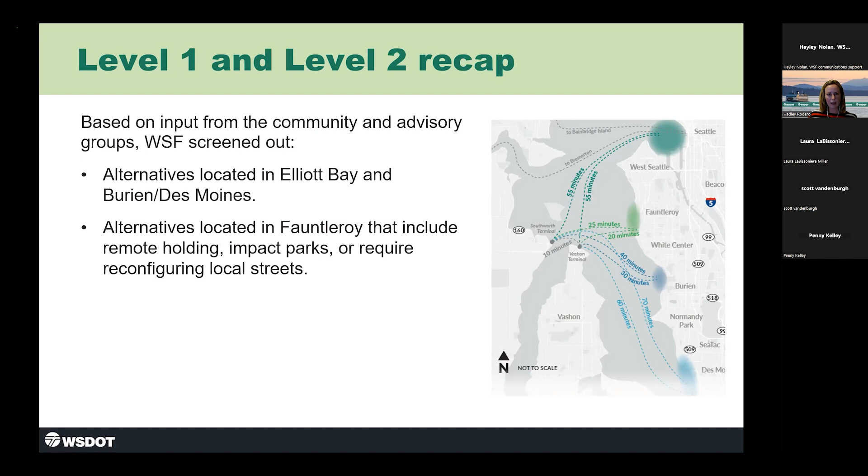A lot of that was based on feedback from this group about impacts that would have on the broader neighborhood and on transit and other considerations. So that brought us to the end of level 2 screening. We released the level 2 screening report a little over a year ago that identified 2 general alternatives: replacing the dock at the same location at roughly the same size as it is today, which holds just over 80 vehicles.

The rest of the vehicles are accommodated in shoulder holding along Fauntleroy Way Southwest for a total of 186 vehicles. We also discussed at that time looking at strategies such as Good To Go or advanced ticketing policies and other operational improvements to make the terminal, and especially a dock of that size, work better and operate better. The second alternative we agreed to carry forward is an expanded dock that would hold 124 to 186 vehicles. But we also said at that time, based on overwhelming comments from the community, that any alternative would avoid or minimize permanent impacts to Cove Park adjacent to the terminal and the nearshore habitat. So those were the two very general alternative descriptions we had about a year ago.

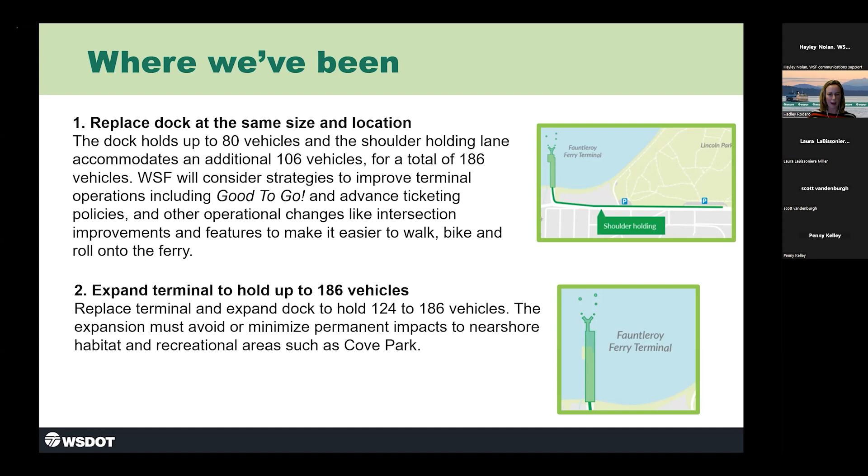Since then, we've been working to refine those two alternatives, and that's what we're going to discuss today. But for more of the process and where we're at, Marsha is going to talk about our timeline.

Thanks, Hadley. We genuinely appreciate your patience this past year as we've been navigating the planning and environmental linkages process and working to refine the alternatives. As you know, PEL is a planning process that involves collaborating with the community and our partners early in the project planning. We are starting the level 3 screening process where we will consider things like traffic conditions, cost estimates, permitting requirements, and ways to make the terminal work safer and more efficiently for everyone. We'll also study Good To Go and advanced ticketing.

All of this work will help us identify a preferred alternative for further NEPA environmental review, where we will evaluate the project and potential impacts on the built and natural environment. We're working on an updated project schedule and plan to begin design and construction by 2027. Please note there is some overlap between the project phases, and we'll work to refine and share updates. This is a multi-year process and will include multiple opportunities for input from our advisory groups, such as you, and the broader community.

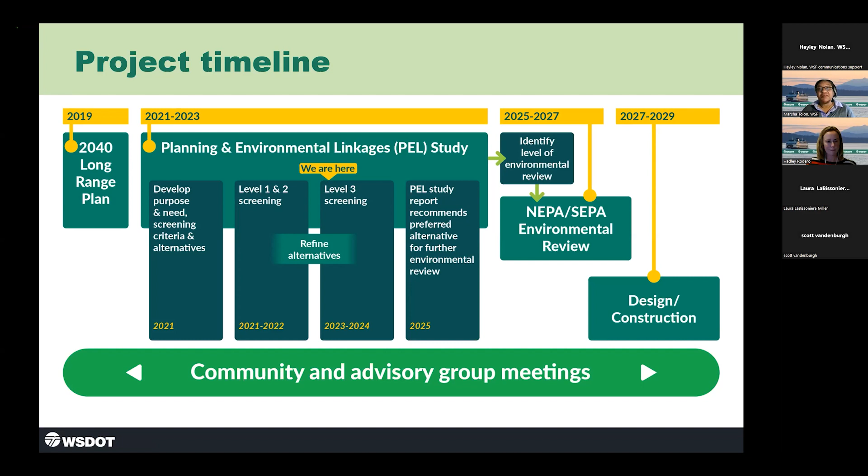To the north, the terminal is bordered by the King County Barton Street pump station. And again on the south is the SPU property and a parking lot owned by the City of Seattle.

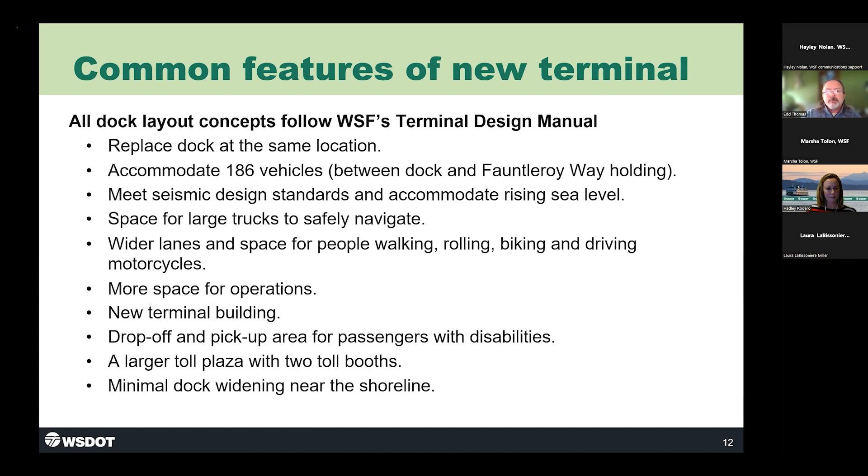Now we're going to present a series of oblique graphics of the alternatives. As we run through these perspective views, we'll go quickly at first so you can see the differences, and then we'll come back and talk about each alternative in more detail. As we scroll through, note that the dark shaded area on either side of the dock, which Marsha pointed out, represents the eelgrass and macroalgae area.

Hadley, could we run through those just one more time?

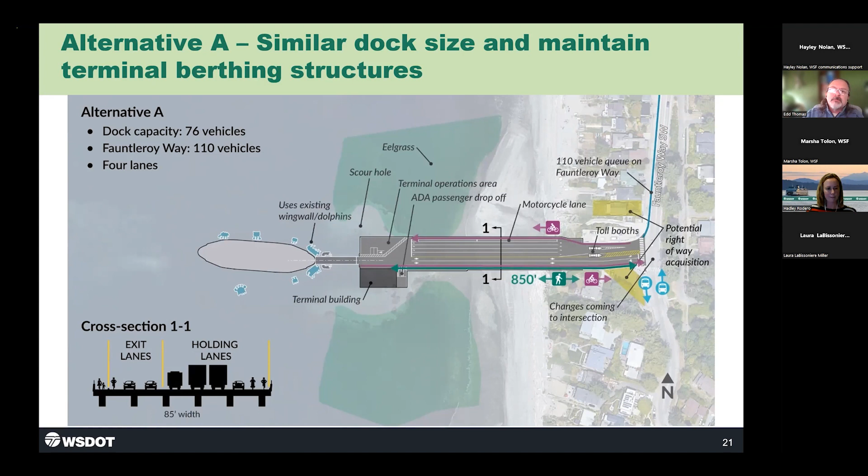The next alternative, alternative A1, is the same width as alternative A but slightly longer than the existing dock, and includes new dolphins and wing walls. This option also has 4 holding lanes and holds the same amount of vehicles as the current dock, which is 84 vehicles.

Alternatives A2 and A3 are variations of A1 with the same layout, but A2 would include Good to Go and A3 would include advanced ticketing technologies.

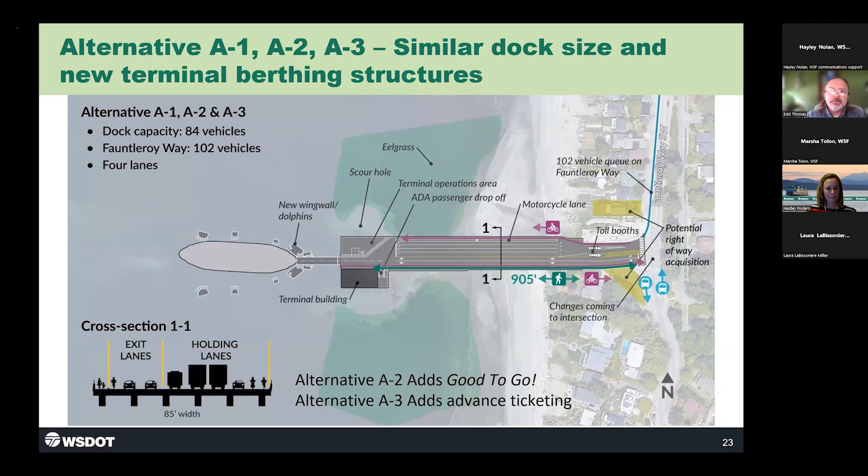Alternative B is the same width as alternative A, but is a longer dock, moving the ferry slip—the transfer span, wing walls, and dolphins—into deeper water. This option has 4 holding lanes and holds 124 vehicles on the dock, which is 1 full Issaquah class ferry. Lengthening the dock and moving the ferry slip to deeper water may allow eelgrass and macroalgae to regrow in and around the scour hole, which would be the same for all of the lengthened dock alternatives.

Alternative B1 is the same length as alternative B. It includes one extra holding lane on the north side of the dock over deeper water, and the near shore widening is minimized to reduce impacts to Cove Park and environmentally sensitive areas closer to shore. With the added holding lane, this alternative holds 155 vehicles on the dock.

Next, alternative B2 is similar to alternative B, has 4 holding lanes, and adds 2 shorter holding lanes to the south of the dock for priority vehicles. This tapered dock design is narrower near the shoreline, again to minimize impacts to the near shore. This concept holds 155 vehicles on the dock.

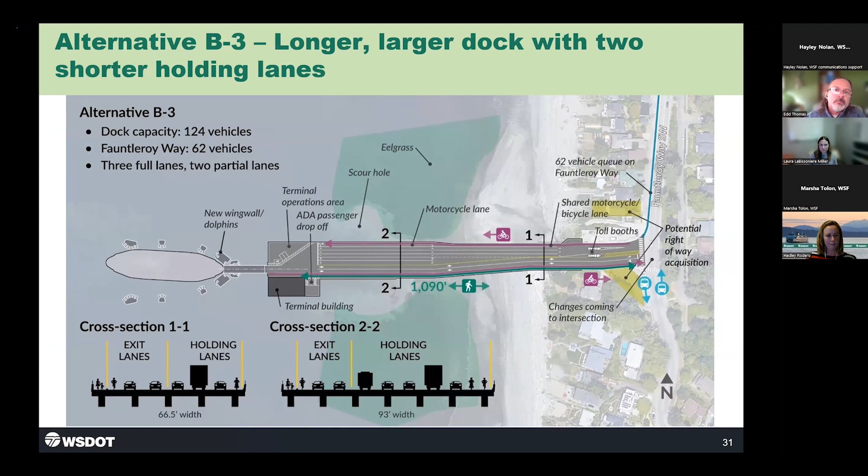They're all variations of a longer dock alternative. Then the last alternative, alternative C, is also a longer dock alternative, similar to alternative B2 in its layout, but adds a full-length holding lane on the north side of the dock. The dock is still narrower near the shoreline to minimize nearshore impacts, and the rest of the design features are the same as alternative B2, including 2 shorter holding lanes for priority vehicles on the south side. This option can hold 186 vehicles on the dock, removing the queue on Fauntleroy Way Southwest on most typical days.

And with that, I'd like to turn it back over to Laura to facilitate Q&A.

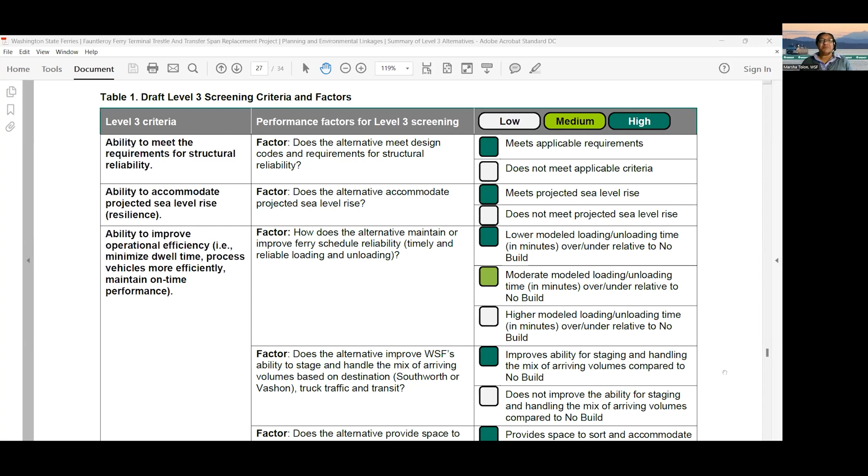You can see the accommodating projected sea level rise is a consistent criterion throughout, improving operational efficiency. There are others as she's scrolling down that you may see within the document that you're familiar with from previous screenings.

The central column, the second one, has performance metrics that we're using to screen in level 3, which were developed out of each of the criteria. The third column shows how we plan to screen the alternatives using yes or no, or high, medium, and low. So as you can see, the screening at this phase is a little more detailed than what we've had for levels 1 and 2, using these specific metrics.

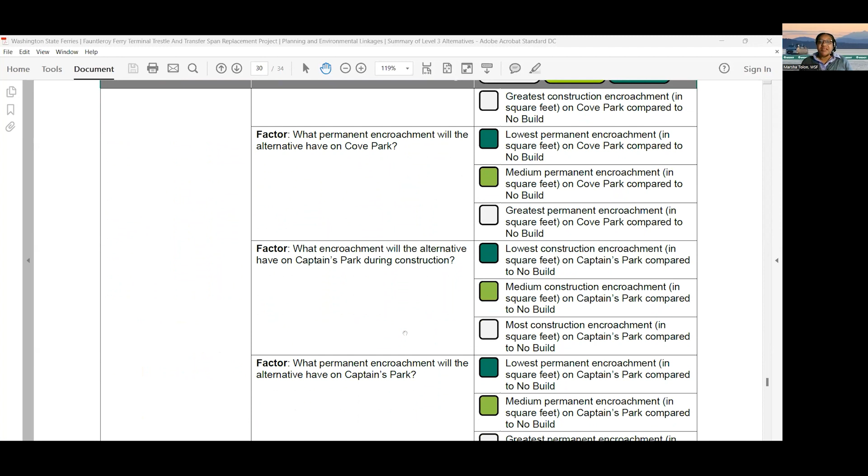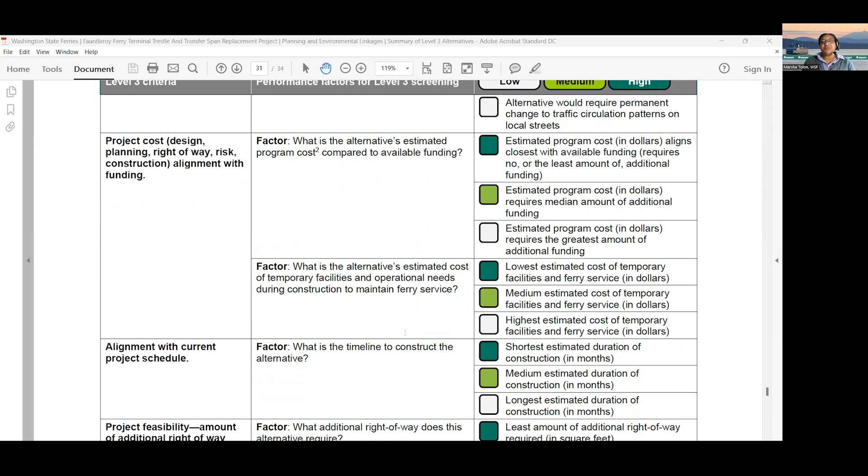It's at a draft state, and we are hoping to get any feedback you have on the metrics and on the approach of yes, no, high, medium, and low. Laura, I'll bring it back to you for more discussion.

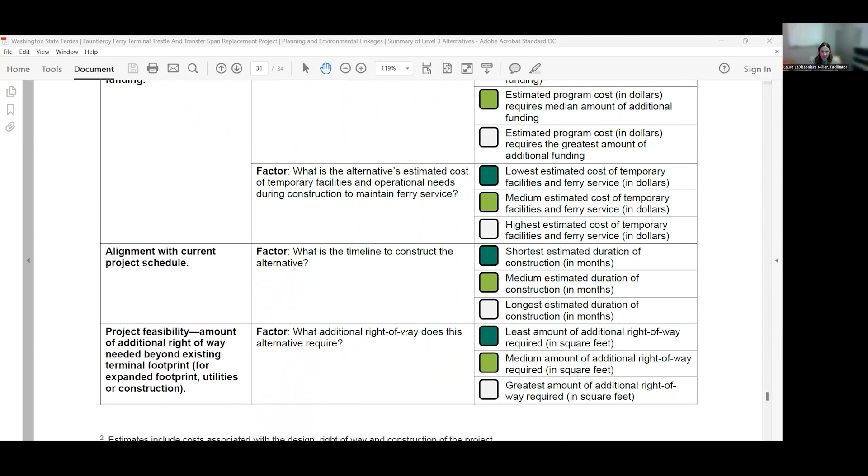Thank you, Marcia. As Marcia just highlighted, these are draft criteria, and we are looking for your input today or following the meeting. So with that, we'll open it up if you have any initial reactions to what Marcia has shared.

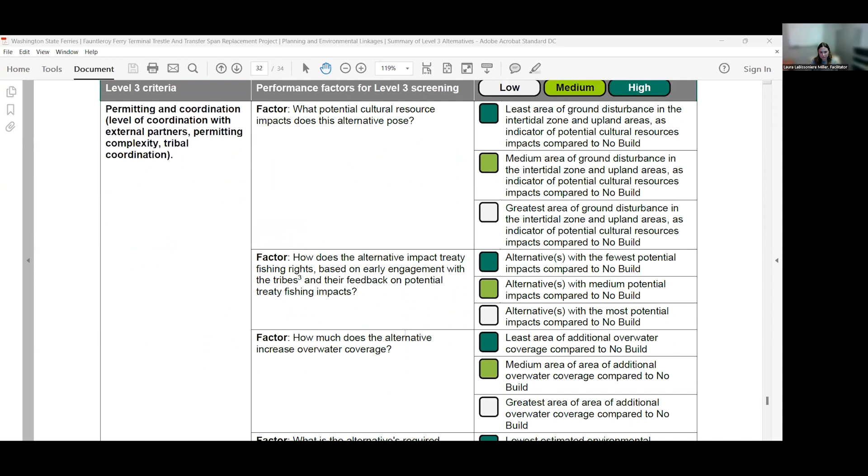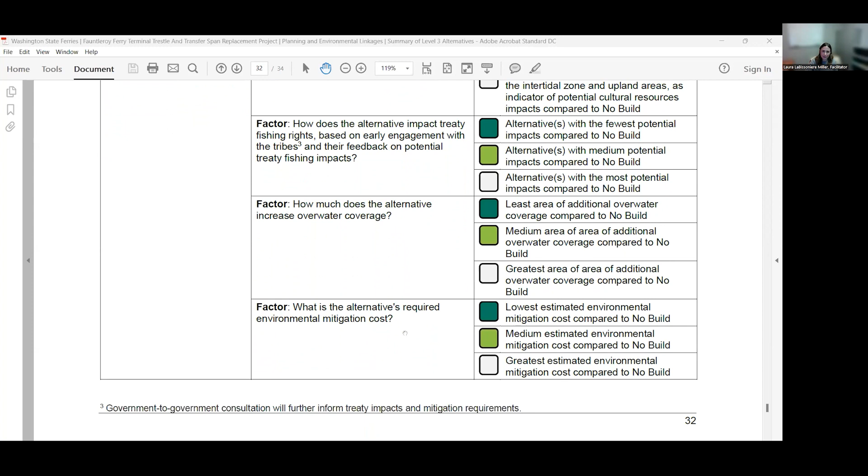Chris, I see your hand is up. I'm just trying to be helpful and speak up first.

I am concerned about the overall over-the-water coverage. I want to understand the trade-off between parking more cars on a dock over the water versus parking cars on Fauntleroy. Environmentally, I'd like to understand that trade-off more.

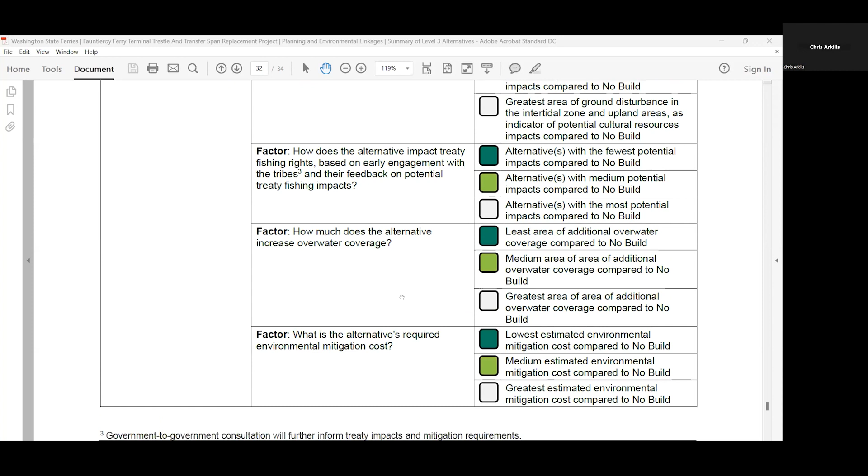All the talk about scour holes and eelgrass is new from when we revisited this a month ago. It seems to make intuitive sense to me to build a longer dock to get the scour hole and the boat into deeper water. However, I am concerned about wider docks. Personally, my own gut tells me I'd rather see more cars on the land environmentally than over the water environmentally. So just a few thoughts on my part.

Thanks, Chris. Great questions there. Marcia, do you want to speak to those environmental trade-offs?

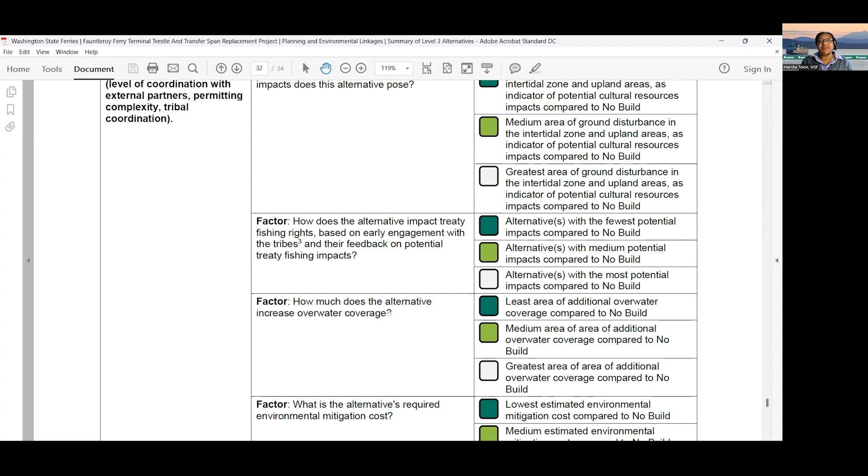Sure, and others from the team can join in to add more content. We are balancing some of the feedback we've gotten from the community and other advisory groups, because this project, even though it's happening at Fauntleroy, is representative of a regional solution for the triangle route, which calls for us to look at how to reduce traffic congestion along Fauntleroy Way.

Where overall, all of the alternatives, as Ed mentioned, have the same criteria, managing for 186 vehicles in total, and all the alternatives represent a mixture of whether they are over water or a percentage of that 186 over water and a percentage on Fauntleroy Way. By processing more vehicles that have already passed through the toll booth and are waiting in the holding lanes on the trestle, that promotes efficiency. When we get to one boatload, which is 124 vehicles, that efficiency marks sort of an even point, being able to keep to our schedule, because they've already gone through all the processing in the toll booth. So we're looking at those trade-offs by how much is brought over water on the trestle and how much remains within the holding lanes.

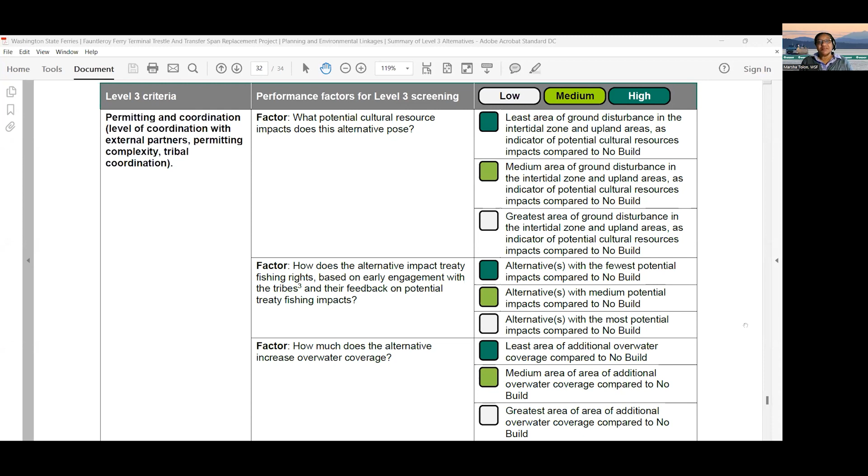We might want to have Ed come on to speak to this, or David if he's available, to talk from the engineering perspective about the size trade-off in terms of operations.

Yeah, I'll just add, Chris, I think it's a good comment. Like a lot of things, there's always trade-offs between expanding the dock over the water and keeping a smaller dock and operating most of the cars off of shore. I think maybe one of the areas you're going with is that having more vehicles over the water creates environmental issues with maybe stormwater collection and the fact that you have cars on the dock.

There will be, as part of this project, a stormwater collection and treatment system that likely doesn't exist up on Fauntleroy Way, where typically those storm drains collect water and just send it right out to Puget Sound. So there will be that element as part of the future project. But yeah, I think what we're trying to look closely at is how we can balance all these various trade-offs, and this screening criteria will help us do that and look at those things that have either low impact or high impact and weigh them against one another. Thanks.

I'd like to add that we are performing a traffic analysis study, comparing the various load/unload procedures for a couple of sailings, and comparing the results of that to each of the trestle size alternatives to see where we can come up with that efficiency point that Marcia referenced. Then we can evaluate that based on queue impacts.

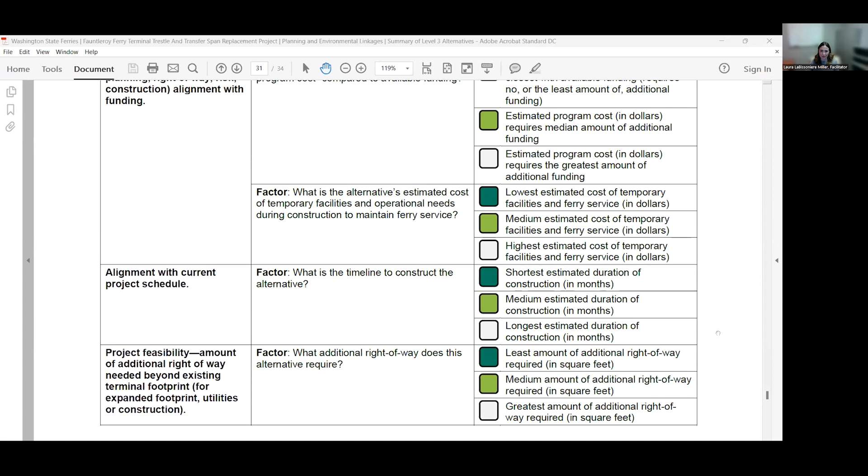Penny, I see your hand is up. Yeah, let me lower the hand, I always forget.

I also just wondered, and I assume this would be so, but from the graphics, which by the way were really great, very helpful - I'll be honest and say I did not get to that memo, but I did get it.

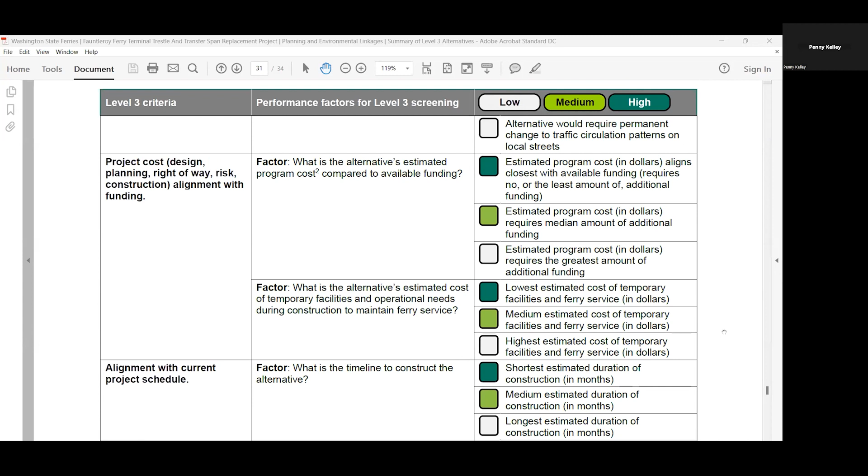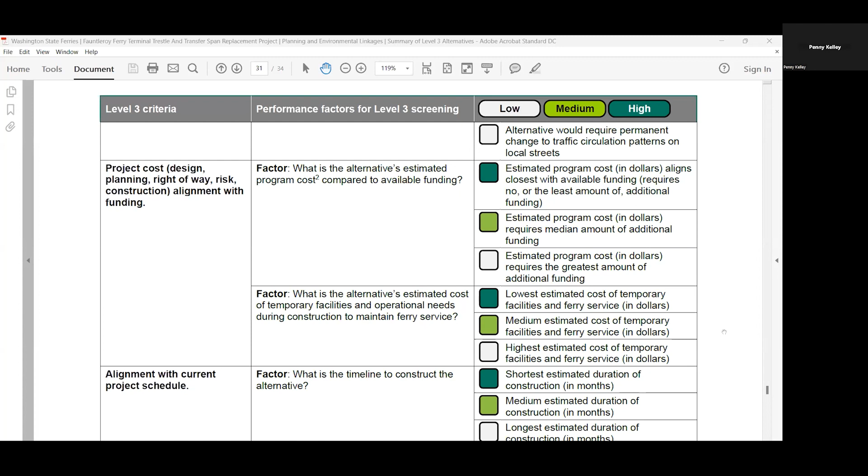I'm wondering if I agree with Chris, and probably some other folks too are thinking this, that the longer options are more favorable to get away from the eelgrass. I'd like to think the eelgrass would start to recolonize that scour hole, which I assume means it has to start filling in. So, do any of the wider options that hold more cars - I was also thinking about that stormwater thing - so that answered my question there.

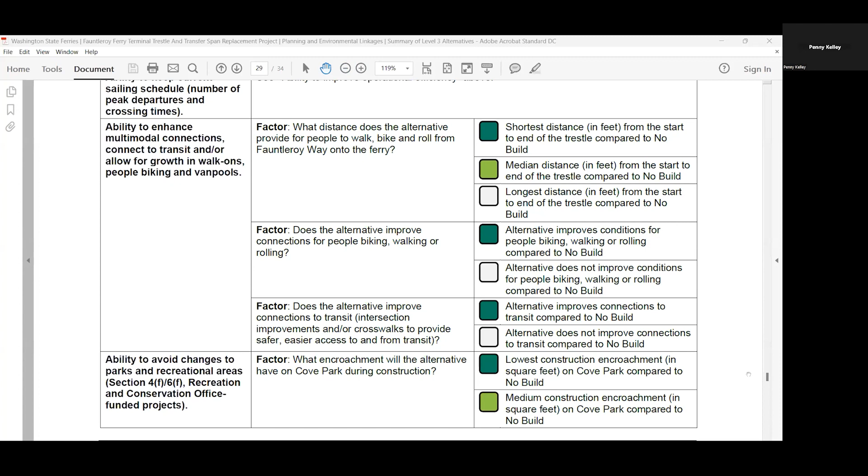In some ways, I'd like to see the cars getting off the road and into a place where stormwater would be better treated. That to me is an important thing to consider for the inputs into that area.

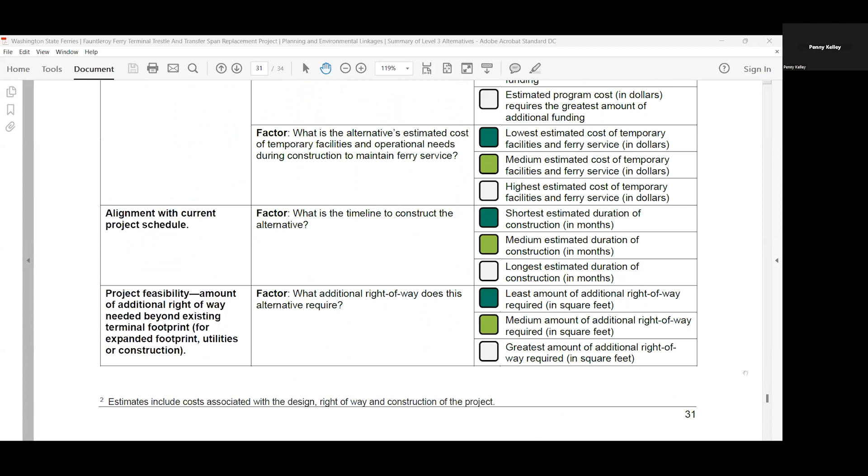But would you also be evaluating if a larger area is going to shade out some eelgrass area? It was really hard for me to see that from the graphics, so I assume that would be something that would be looked at.

Would Washington State Ferries also say, hey, by extending the dock we think the scour hole will fill in? And would you want to throw that out there as something that sort of compensates for the wider dock shading out some of the eelgrass? And then would you also monitor it? So those were some things I was thinking in terms of questions and conversation.

Thank you. I heard several questions in there related to the scour hole, and also about stormwater. Marcia, do you want to tackle those?

Sure. I know we're looking at the table here, but if it's possible to go back to the slides and show the one with the bathymetry on it - generally where you see the scour hole, and then the bathymetry kind of shows it too.

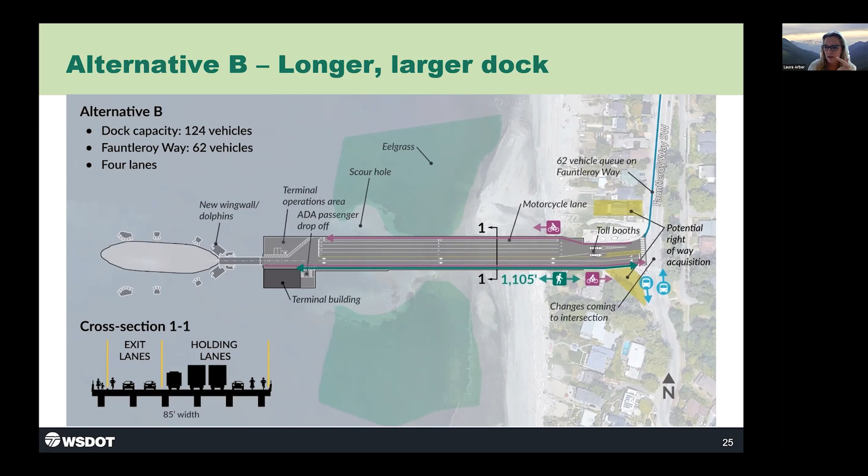What I'd like is to see it as an overlay over the existing structure, which is why I like the other imagery with the bathymetry on it, because it's more transparent and I can see more of what's going on versus this type of imagery you have up currently. So it would be helpful for me when looking at these to see an overlay of option or alternative B relative to existing, and B3 or whatever relative to existing, because it gives me a better picture of what is proposed versus existing.

Especially if it's got dimensions. I know I'm going way down the path of where I'd need to go when evaluating something, but for what I'm looking at, to fully evaluate what I feel would be a favorable option, I think it would be helpful to see more of that, to see exactly where those changes are occurring. So when you say it's 18 feet wider, where exactly is that 18 feet going to occur? What part of the shoreline, or what part of the trestle, will that occur in?

Or when you're showing how long the structure is, the stuff you currently have says 1,000 feet long or something like that, but it would be helpful to see where the additional 224 feet or whatever is at the waterward end of the structure, because that layout just better shows the picture of what we're trying to evaluate and the benefit.

Yeah, that's great feedback, Laura. I think that's definitely something our team can provide, and actually something that came up as part of our executive advisory group meeting too, so we can look into doing that.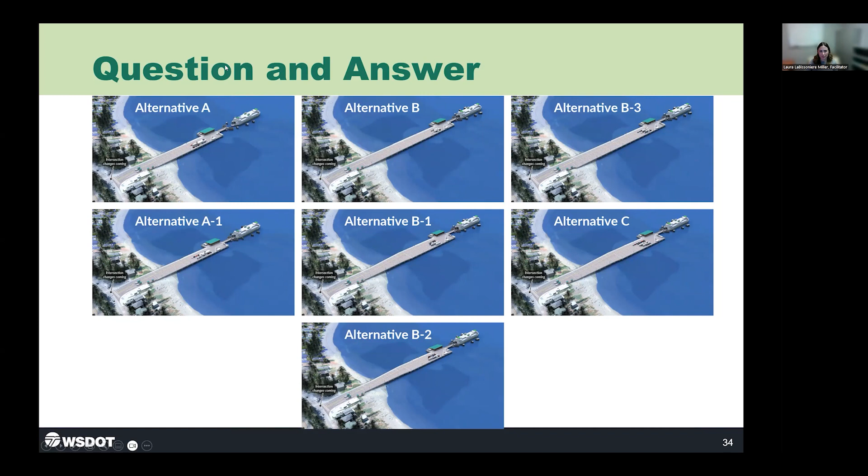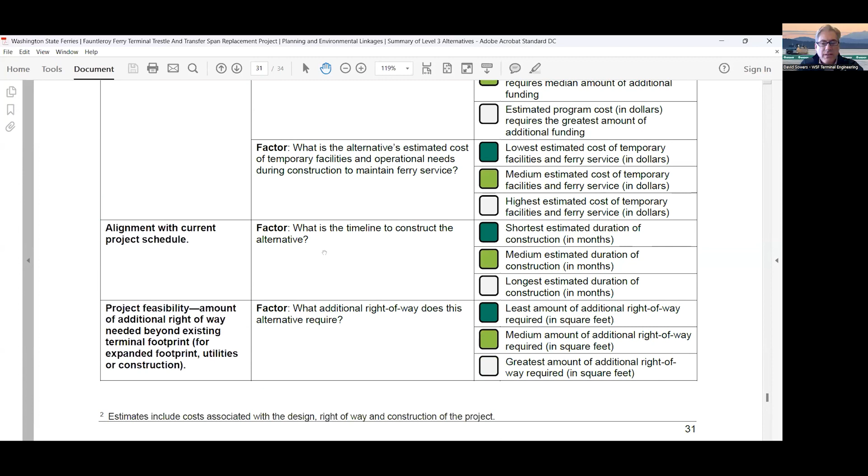Yeah, thank you, David. Haley, if you want to go back to the screening criteria—that's actually a comment that came up during the community advisory group as well, and sounds like an opportunity to refine our criteria. Dave, would you like to respond about how we're reflecting queue length within the criteria? Yeah, David, we've heard that comment and it's a good one. As Chris Arkle said earlier, there are always trade-offs, and taking vehicles off Fauntleroy Way and getting them over the water certainly is a trade-off. But this is a screening criteria, so that'll be an important thing we take a look at, and we will factor that into the decision.

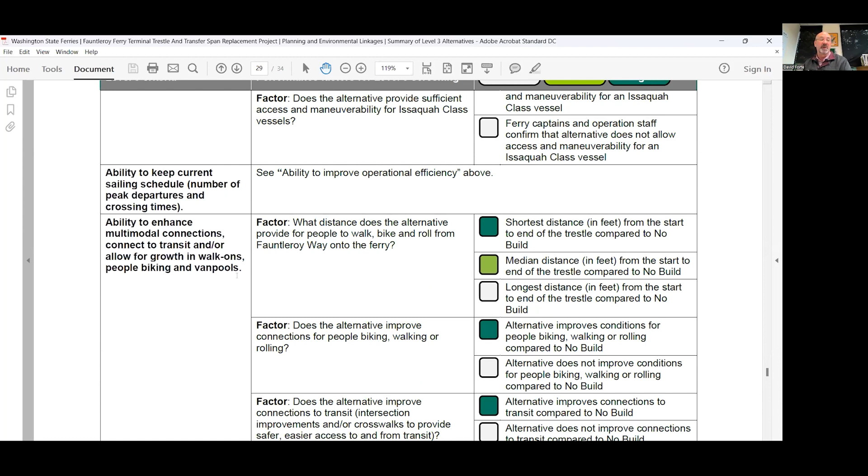One of the things I still like is the Good to Go aspect. That has always been a good thing to help speed up the processing part. Now, the other one that was mentioned, they're using a different term for what I think is reservations on your operational side. I'm not a huge fan of reservation systems, especially in these types of environments, but Good to Go processing is a significant plus to help with queuing and increase operations.

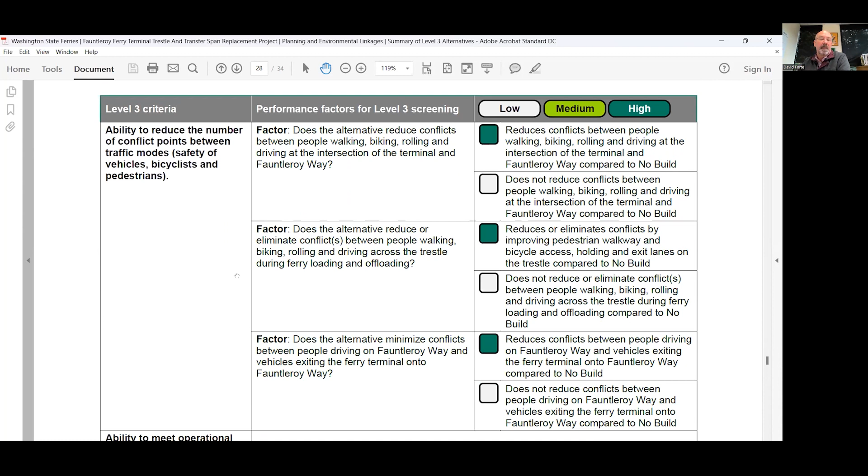Thanks, David. I know we're going to get into that more at one of our upcoming meetings, but Dave, do you want to speak to the difference between reservations and advanced ticketing, which is part of something we're looking at for this project? Yeah, so as part of the alternatives analysis, we will be looking at Good to Go and advanced ticketing as ways to improve efficiency and throughput at the toll booth.

Advanced ticketing basically means you have a ticket prepaid and you just flash it and drive on, rather than processing, pulling out your wallet, writing a check, all that kind of stuff.

We have not looked at a program where we would implement reservations. Initially, those always seem to have mixed emotions around them. I think in the San Juans they've turned out to be very effective, and they've done a good job of reducing a lot of queuing and holding times. It's not something we're looking at as part of this project, but I have heard people talk about implementing that approach around our system. For now, we're just looking at how Good to Go can improve our operability and efficiency downstream from the toll booths.

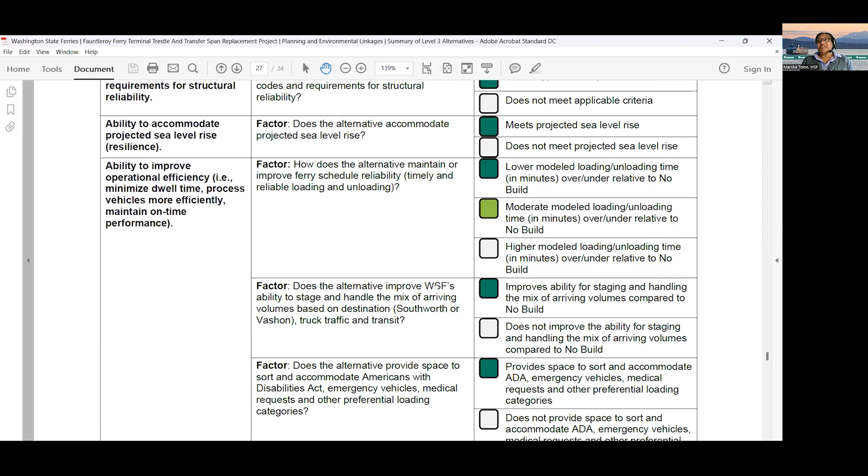I would like to mention that Adam Ospikoff mentioned that as we move further on, we might look at other habitat benefits or opportunities, to grow oysters, or for water purification, things like that. He mentioned if he wants to come on and say more about it, I'd welcome that.

I'm not an expert in any of that area. I was just curious, thinking about different benefits or opportunities we may have for purifying the water in that way. Just kind of a random thought.